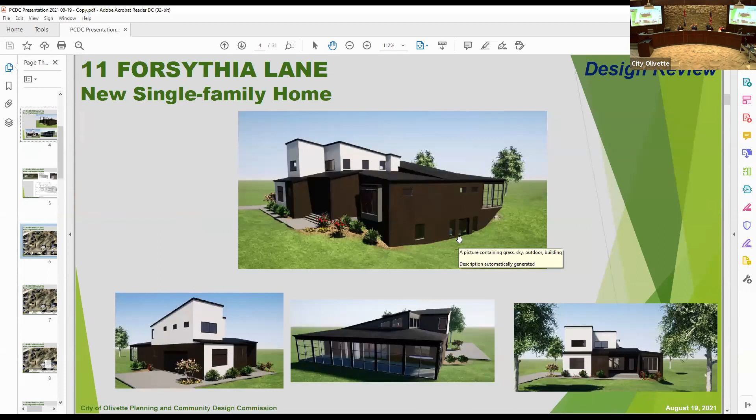There's one hand raised, all right, and we'll get to those. Bryan, since you're not here, did you have any questions for Carlos? I don't, thank you. Okay, Carlos, I don't think there's any other questions. I think it'd probably be good to bring the petitioner on so he can recap their discussions and go through the proposed changes.

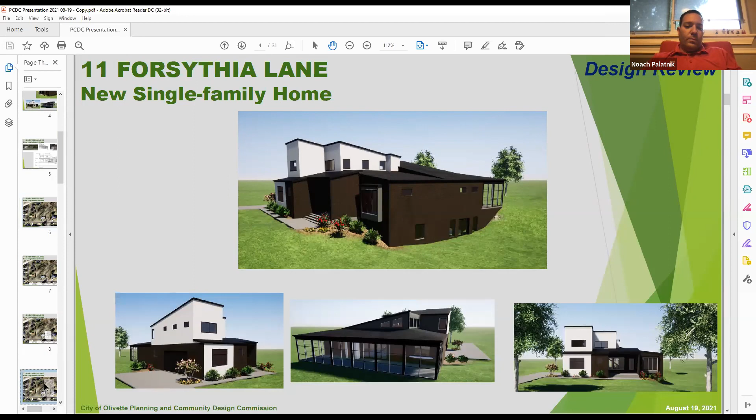Were you able to make contact with both sets of neighbors, or just one? On the east and the west, yes, I spoke with both of them. The neighbor on the west side had no issues. The neighbor on the east side did still raise some concerns, I think.

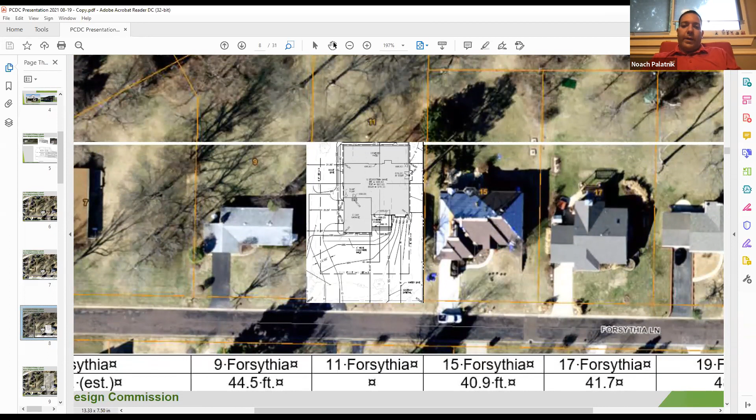Basically what I said is I brought it closer twice, and I understand that from his house, if he's standing in his back door looking towards the west, part of my house will block his western view. But if I would build a ranch house, or anyone else built a bigger house, this is not a very large house compared to some of the newer houses on the street. It could extend even further if it was closer to the street.

I really tried my best. Originally I wanted it in the middle of the lot because I didn't want to take down any trees, and it's a beautiful backyard. But I did understand their concerns. They wanted to make sure the center of the street stays looking like a park. I also, by moving it closer because of the elevation, lost the ability to have a walkout basement with window bedrooms there. So in a way, my original plans for the value and size of the living space got decreased, but I prefer that to having angry neighbors.

How much more did the other neighbors want it moved up? No one gave me a specific number. There is another house on the street that's 48 feet setback, and I did hear from two people that they would be okay if it was at that depth. I explained that I'd prefer not to, because if I moved it closer, the driveway goes around the tree on the west corner of the lot, and I wouldn't be able to do that anymore. That tree would have to come down, which is a very big mature tree. I also pointed out that on the next street over, there are four houses set back about 60 feet from the street, so I'm not the first to place a house at this depth.

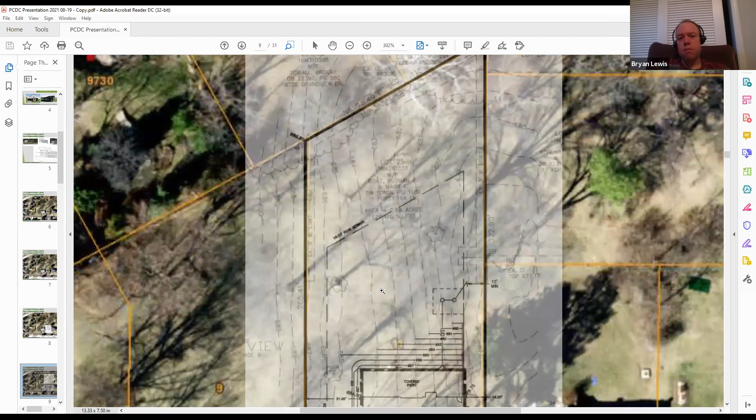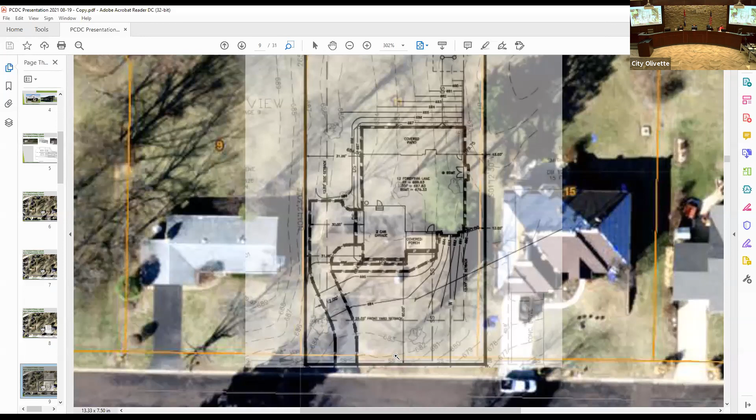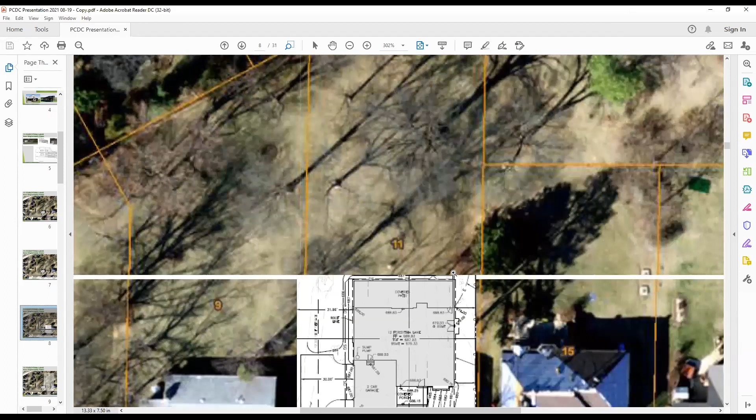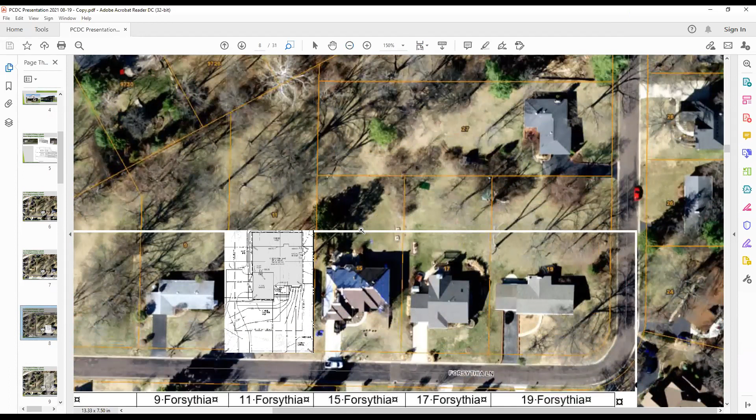Carlos, is the 60 feet the front facing, or is that the depth total for the house? Sorry, Mr. Lewis, I can't hear you. Sorry - the 60 feet is the measurement from the front face of the garage to the street right-of-way, and that's where we generally measure the building setback. You'll see in this graph - bear with me one second. In this slide, we measured one from some plat data that we have on file due to various building permits that have been issued, and then took estimates off the St. Louis County parcel data system of what those distances are, and those distances are reflected in the table on the bottom portion.

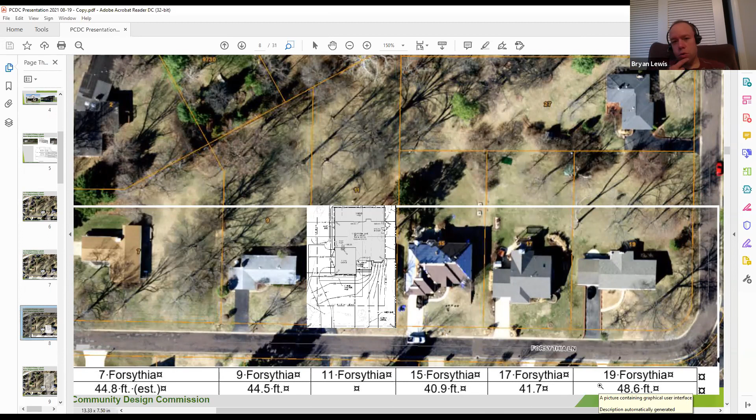Well, I'm not sure - Bryan, did you have any more questions? No, I'm curious to hear from the neighbors because I assume there's a bunch of people on too, but I'm good on questions. Yeah, I think let's see how they all feel about it as well.

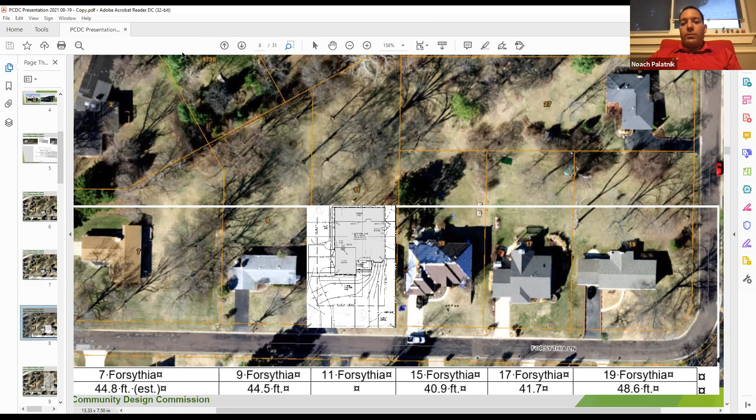A lot of the houses, if you scroll up the street, don't line up at all. Some of them are not even set straight on their side. That's not a cookie cutter street, and I think the neighbors are happy that it's not a cookie cutter street, and people build their own custom homes here. I understand you can't always make everyone happy, but I think twice already I went and moved the house much closer to the street than what I initially wanted, and each time it's completely up to code.

I am not doing anything, of course, that's against city code. So I didn't feel like I needed to meet with anyone on the street to explain that I just want it there. The reason is I don't have to come up with very specific reasons—I just understand it can't make everyone happy.

That's all I have. Would you be willing, after hearing the tremendous amount of people indicating still some concerns, to consider moving it up some amount? I moved it up based on the meetings with them twice, but I got the same answer, that it's not enough, regarding the amount of people.

Sorry, go ahead. Well, the first time it was placed, people from the back of their doors or coming out would see the front of your house. You did move it up the second time, but it was still pretty far back, considerably back. This is getting in line. I'm not sure how every other commission member feels, but it'd be my preference to bring it up a little bit more—that would be my thought.

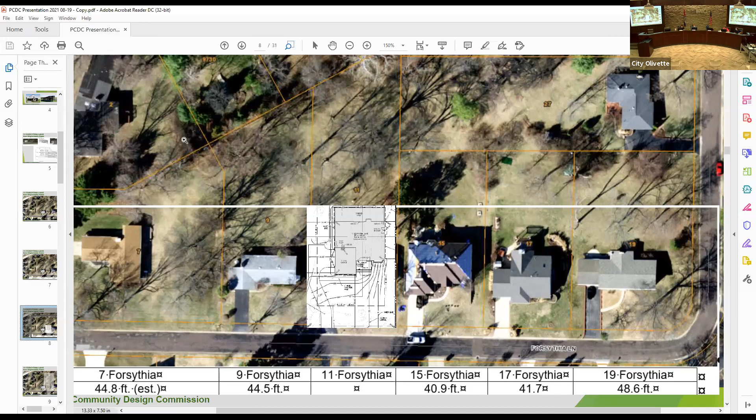I don't think that's the case. I think it's because of the existing ground elevation - when you move it forward, it rises. But Mr. Palatnik, can you confirm that?

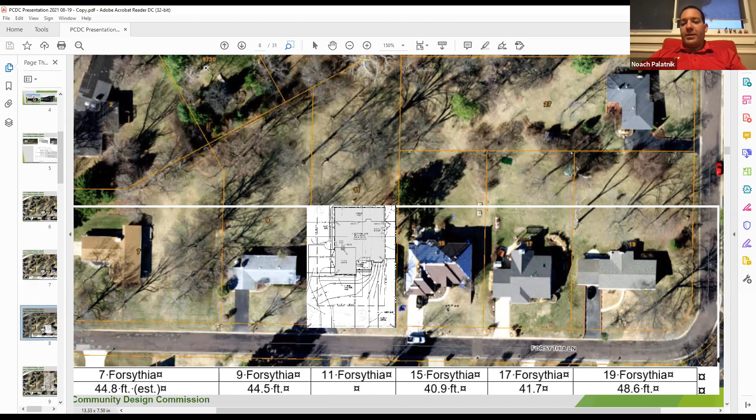Yes, sorry - it's not the last 20 feet that changed it. It's the original plan of the house where it was in the middle of the lot. The lot is flat, completely flat. The only area where the lot dips, just for a very short stretch, is in the middle of the lot, where I was able to get a walkout basement and bedroom windows in the basement - which was another reason I wanted it there originally. By moving it to 80 feet, I already lost that ability, which stayed the same moving it to 60, and would stay the same no matter how much closer I moved it.

Chairman, regarding your question on the motion, if the motion doesn't have a majority, it fails. Okay, so that is the result. That would be the outcome.

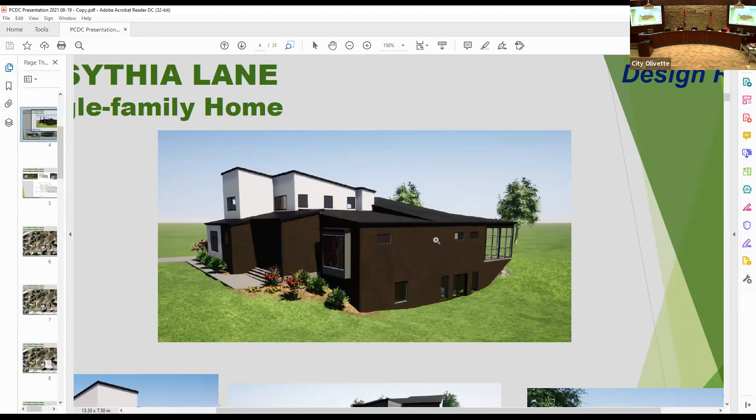Just for clarification, this rendering here represents the original placement. Yes, so this walkout still is represented in the revised plans. So the walkout is not eliminated.

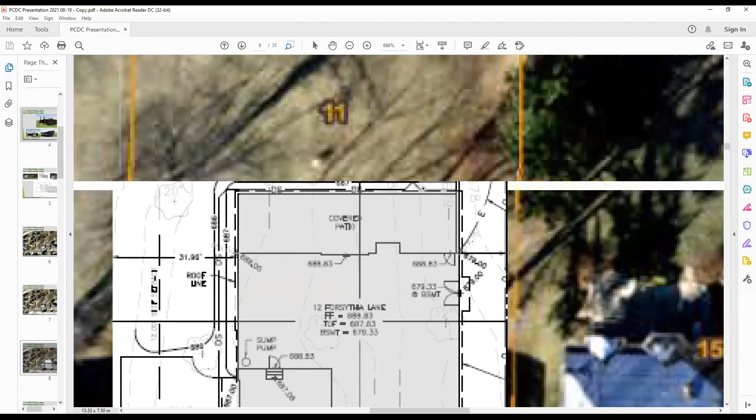It's not. To the best of my knowledge, there was no walkout on the rear part. Yeah, Carlos, this is Jeff speaking. We don't want to go through all the motions of revising all of this and keep having it denied. There's thousands and thousands of dollars leaving Noach's bank account for that.

So all we've submitted to you, and I believe you already knew this, is civil engineering drawings showing how it could be regraded. Correct, and those show the walkout. But that's not gonna happen. In my discussion this afternoon with the civil, because I needed to clarify those numbers, there's still a walkout.

Oh, he's saying it can work? Again, in my discussion with the civil this afternoon, he's showing those contours right in the front. I know the answer to this.

So if you look at the original drawing, you see a walkout and about 4 windows there. By moving it forward, we're digging into the ground with steps going up in order to have only the door to get out of the basement. So I'm still making a door to get out of the basement where it's at right now, because it's not in the middle of the lot where I was able to actually be on ground level.

So I lost all the windows, but I still wanted an option to get out of the basement. I'm not sure what it's called, but they dig in and there are steps to go up. It's a forced walkout, if that's what's going to happen at all. It's a forced walkout, and no bedrooms, because that doesn't change from the 80 or 60 or 40. That only changes from the 150 in the middle of the lot to anywhere closer.

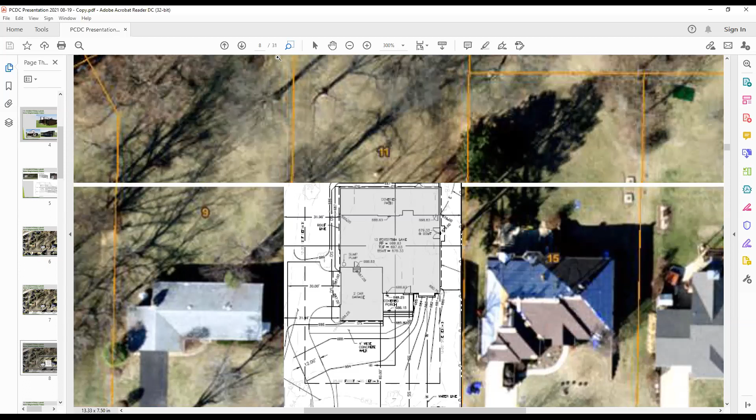And I don't think that is really what Olivette wants. I understand certainly the frustration about the communication and trying to get everybody on the same page. I personally feel like my client has made great strides from where he, and candidly I, originally wanted the home, with efforts to save as many trees as possible. The delta from the front of the home there to the left, if you will, in this image, to the front of the garage is not that great. And we're already losing the one tree.

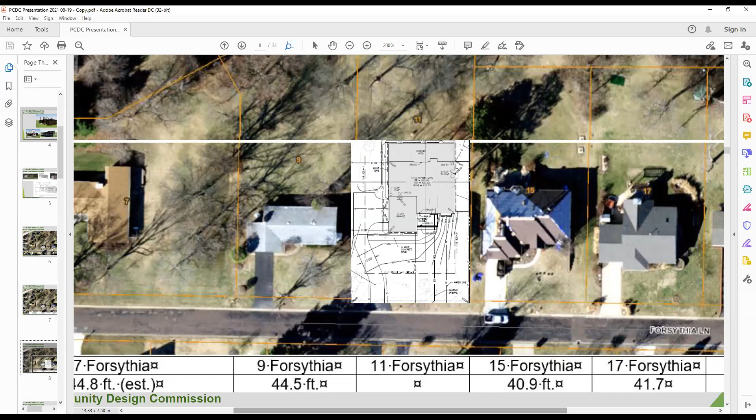This placement allows us to keep the mature tree that's left so that this doesn't feel like a tract home development. I think we all know it takes a great deal of time for a tree to grow to a substantial size. This is an opportunity to, for lack of a better phrase, save a tree, but also save a streetscape that has mature trees and let this house feel as though it either hasn't impacted the community streetscape, or at minimum, it may feel as though it's been there longer because we've left the mature trees. My team strives to do that really on any property we can. And that's really all I have to say.

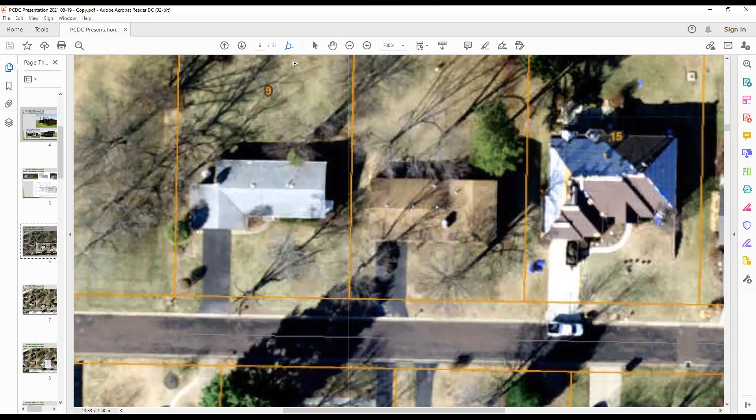Thank you, sir. Any other questions or comments from the board members? Any other questions or comments from the public?

And then I'm just going to ask Bryan if you had any other questions or comments, just since I can't see you. Nope, I'm good. Okay.

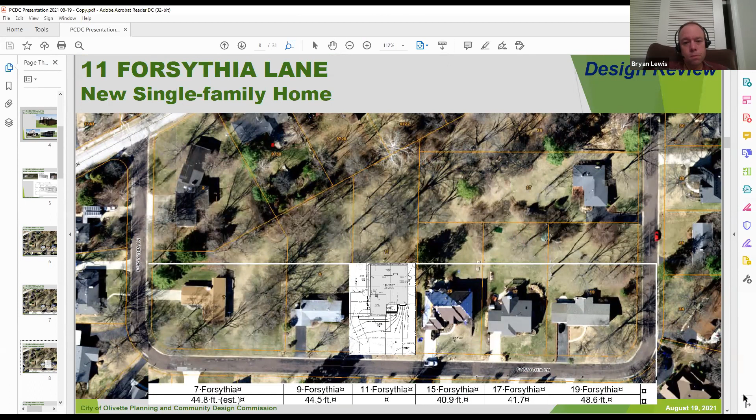Okay, do I hear a motion? Chairman, can I provide some comments on that before the motion is made? Yeah, that'd be great.

When we receive an application for community design review, that reflects that the petition submitted is in full compliance with the city's zoning regulations. The city is solely responsible for the enforcement of zoning regulations, and we have a guidelines book, but those are just guidelines. We use that to assist and establish the community aesthetic standards. They're minimal. Some subdivisions go into great detail, but they're responsible for the enforcement of that detail. All of that's given that we have to apply this to the community as a whole.

We can't be selective to one subdivision and apply one set of standards and then apply a different set of standards to another subdivision. But there's also enough in that document to give the commission some guidance to take a look at some broader pictures like this setback. And the initial setback of 120 feet was significant.

When you reduce that 120 or 125 feet to 80 feet, and then you go down to 60 feet, numerically, it looks like there's been great strides. But again, it started off at one extreme. Bear with me one second.

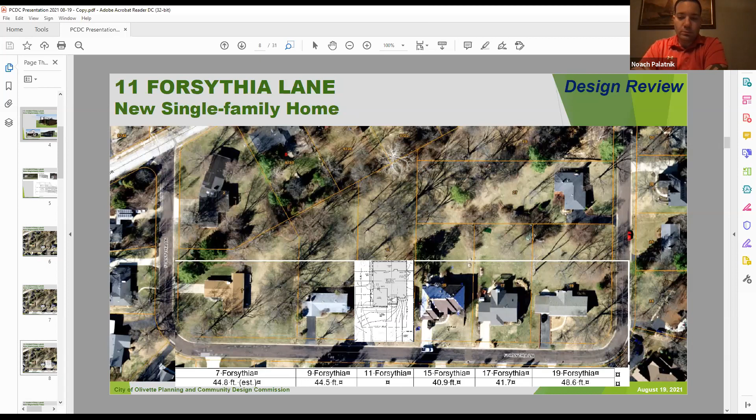Maybe we can just go ahead and make the motion for how it's there with 5 feet closer, if that's agreeable to everybody. So the first motion would be, again, to follow your traditional recommended motion, to have a second, but not to take the roll call vote. Can't we just add in the staff conditions that it would be 5 feet closer? Yes, if the motion maker brings it in automatically, then you are correct. Okay, understood.

Any more questions or comments before we get started? Seeing none, do I hear a motion?

Would somebody like to make a motion? Motion to approve the petition for community design and concept stormwater management plan review for a new single-family home at 11 Forsythia Lane, as presented in the memorandum from the Department of Planning and Community Development dated August 19th, 2021, subject to any staff conditions noted herein, that there will be an increased setback. The front yard setback will be at 55 feet. Correct, I think that's pretty close. Is that right, Carlos? Yes, sir.

Okay, do I hear a second? I'll second. Okay, motion's been made by Tim Spiegelglass and seconded by Jody Rich. Carlos, will you please call the vote? Yes, sir.

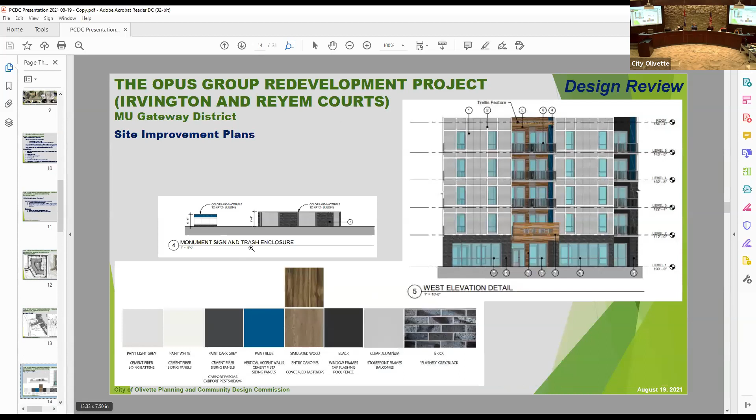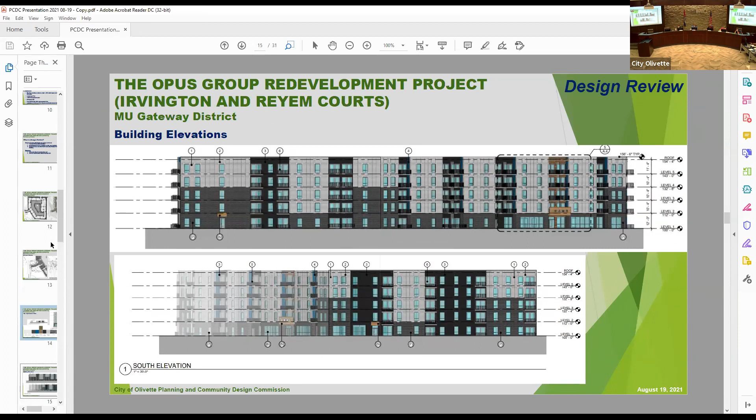But that being said, they went through an extensive process to illustrate their building and designs, and incorporated various comments that the commission had regarding screening of the balconies, the retaining and buffer wall, and the landscaping, and heard various concerns from adjacent neighbors regarding the impact the development would have on their properties. But overall, the process did go through, and a master development plan was adopted.

It was forwarded to the city council, which adopted that plan. And this is the final step, where you see, like any other single lot development, the improvement plans or what's proposed. That's what you have before your packet. There hasn't been any significant modifications.

The building footprint itself did kind of tilt a little, but nothing significant in there. That was as they got more down to engineering and things of that nature. Overall, the elevations remain the same, the landscaping remains the same. You can see they've updated the plans to reflect

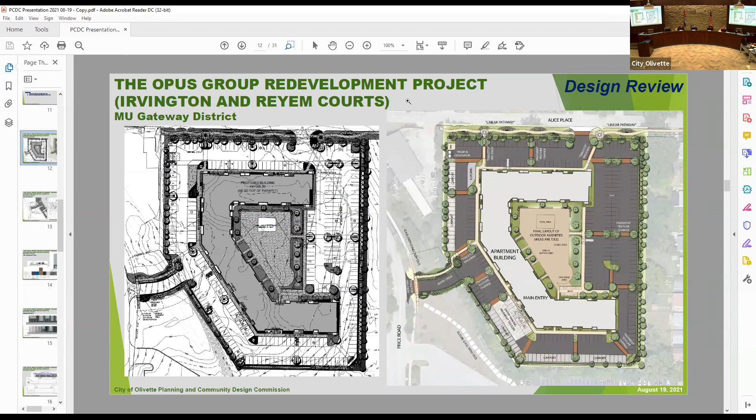the park area along the front in there, and I'll show you that more detailed illustration here. Of course, that will get extended to Hilltop down here to the east and to Price Road down here to the west, with the city doing the improvements on the western side, given a contribution from the developer, and then the developer doing the installation of the sidewalk on the eastern side to Hilltop.

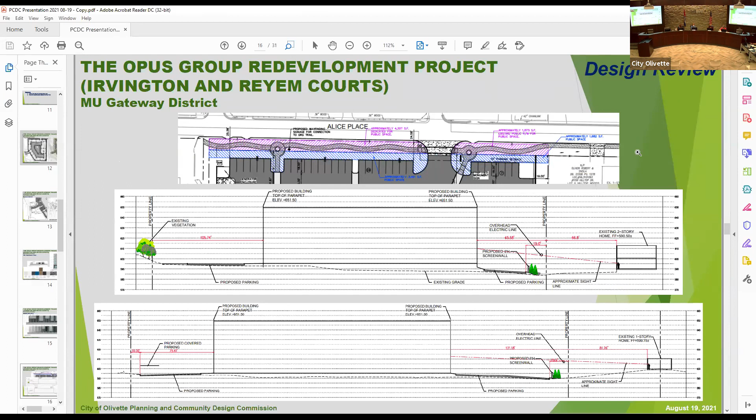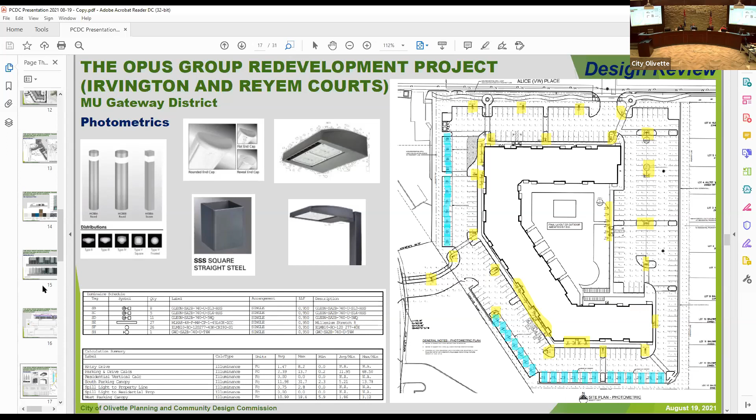So be glad to answer any questions. The petitioners are in attendance, they have their full team here, including their architect. But really, this is the design review. And given the size and that it is a single building, there is no significant change beyond what the commission has seen back in April, or what was presented to the city council.

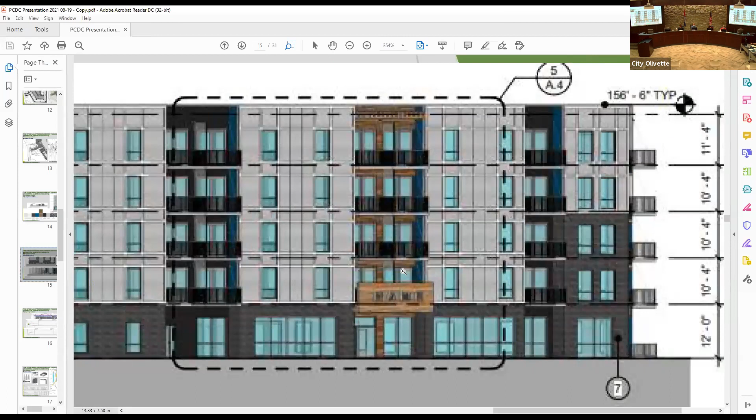They've incorporated the screens again for those balconies, addressed the buffer wall and some of the landscaping, and also the front door and the elements to help identify it a little bit more. There were some comments from the commission, and I think all those were illustrated in other applications.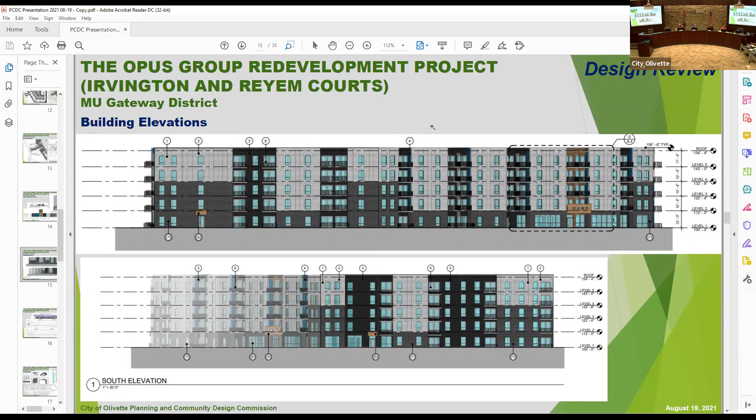The other thing, we know that there was concerns from adjacent property owners regarding how that would impact or have a weight on their property for future use as single family residences. The city has been in discussions, is aware that there's been discussions of another group trying to assemble some properties along that area. Now that is going on privately. I mean, we are aware of those. I'm not sure there's been any finalization of acquisitions or contracts yet, but that does seem to be proceeding, and we'll see how that goes and update the commission if any new plans or developments arise.

Be glad to answer any specific questions. And again, this pretty much reflects what the commission saw back in April. The details include all the amenities and the illustrations that were in there.

And again, just to be honest, there was, the building just kind of tilted slightly. Where did it tilt? More along, I would say, like the footprint itself kind of tilted clockwise. Like rotated, the whole building? Yeah, but rotated, within a foot's tolerance. Yeah, so, okay.

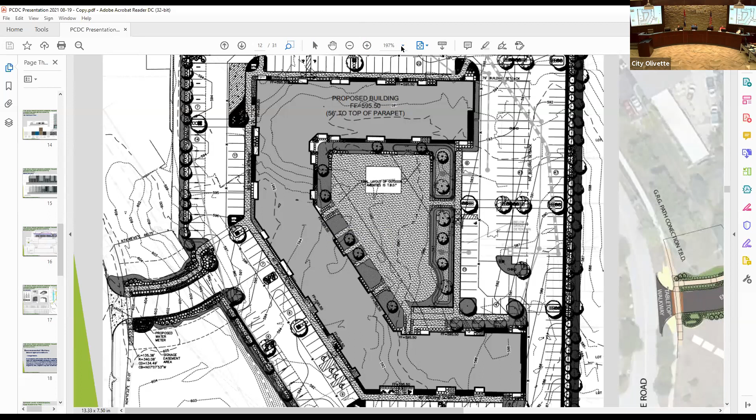My only question is about the Great Rivers Greenway. I know it says to be determined, but I was just curious to see if there's been any further discussion on that or any developments with that.

That's a good question. So there has been discussions among the developer, the city, and the Great Rivers Greenway. This section of the Great Rivers Greenway path has not been finalized, there's not a final design yet, just a preliminary design. The Opus Group is willing to work with the GRG on that, and so far everything's kind of coordinated together. At this point, GRG is just really not sure where the crossing will be, or the property acquisitions and where the trail placements would be more specifically here.

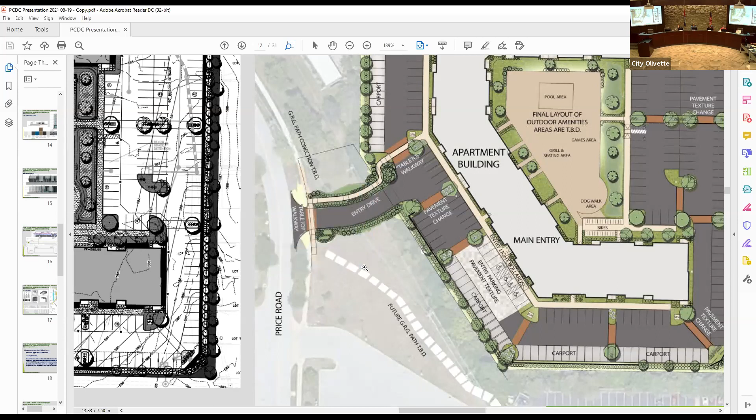Will that be determined before they potentially would start construction on this? No, but I think some of the agreement is that if not, the crossing would be pretty much along the current sidewalk path. In there, some of the discussion's been more about how that, and I think here the developer is trying to illustrate that there would be some type of, I forgot what they call it, Tabletop, where it goes up to a flat spot. And I think that's a good way to address that.

Carlos, I just wanted to check one question. The location of the entry drive, is that pretty much set at this point? I know for a while there was a lot of discussion about where. Yes, they were looking at that. One is that they've secured through the CVS property that they would have access through that.

And that was primarily through actions of the commission and the council back in 2004, 2005. There was flexibility in the placement. This is the preferred placement in there. And the only issue at this point would be that there is some title issues regarding the ownership of Price Road, that the city is taking charge and working through those, with the full intent that it is our road, we maintain it and we surface it.

But we need to confirm the title. We need to clean the title on it, really, is what that is. That may happen in various means. One, it could be voluntarily released by all the property owners since they don't maintain it - it's been the city's maintenance for years. Or we go through a court to assign the title or the right of way to the city. I don't believe there would be any opposition, but I can't guarantee that.

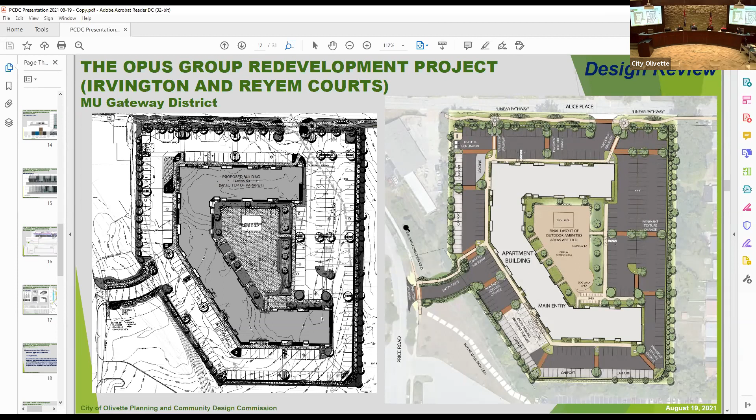I do have a motion for the commission's consideration. There are no other public comments or anybody else identified as wanting to speak. If you can bring up the recommended motion, that'd be great. Do I hear a motion?

Go ahead, Carol. I'd like to move that we approve the petition for design review in accordance with section 400.2180 for construction of a 5-story, 207-unit multifamily apartment complex, in accordance with ordinance number 2726, as presented in the memorandum from the Department of Planning and Community Development dated August 19, 2021, subject to any staff conditions noted therein.

Motion's been made. Do I hear a second? Second. Motion made by Carol Wagner and seconded by Tim Spiegelglass. Carlos, will you please call the vote? Commissioner Spiegelglass, approved. Commissioner Lewis, approved. Commissioner Rich, approved. Commissioner Wagner, approved. Chairman Dragell, approved. The motion passes unanimously, 5-0.

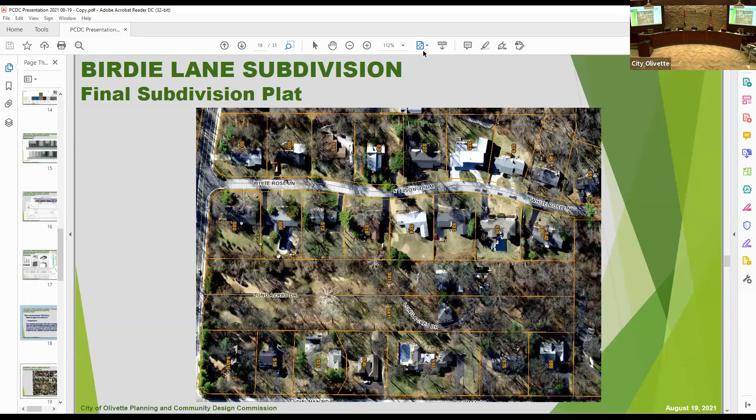The next step is what we term a final subdivision plat. The final subdivision plat specifically is the legal instrument that gets recorded for the creation of the lots through St. Louis County. It's a state mandated process. At this point, the commission is just reviewing the plat itself, and this is the plat.

The plat does not contain any information regarding topography. The plat doesn't contain any information regarding house footprints or trees preserved or the width of the street, the sidewalk or such. All it does is illustrate each of the legal aspects of the subdivision grounds, which includes each individual lot, all easements, all right-of-ways, and any other significant notes that are to be maintained on the property.

In this case, this plat goes above and beyond to conform to the conditions of recent amendment by the commission to establish easements for all the detention swales that will be serving the common ground detention basin. It also illustrates the calculations for the size of the lots that were used in there. That'll be more in your paper version.

And then we also get a copy of the indentures, and the indentures also note, and this was shared with the commission at the last meeting, how the common ground and those easements would be maintained and such.

So this allows the process for each individual lot to come before the commission without its own on-site detention system for the first construction of the home, subject to the conditions that were approved by the council, recommended by the commission and approved by the council.

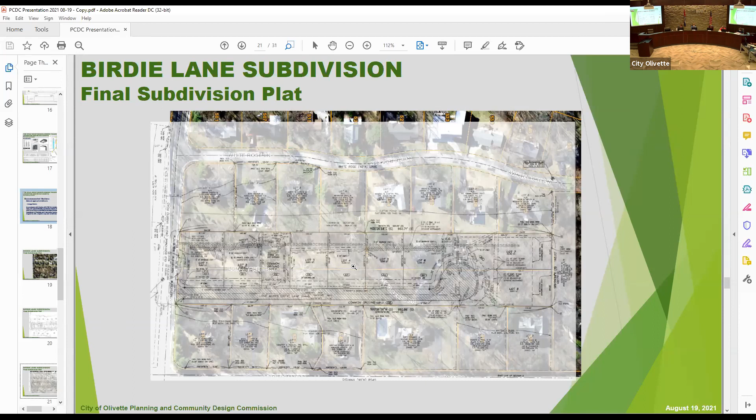So be glad to answer any specific questions. Again, this is just the legal instrument that will be recorded at St. Louis County. On our website, you can find the preliminary plat, and you can also find the improvement plans that give more specifics to the location of the infrastructure, the roads, the sidewalks, potential building pads, tree locations, and things of that nature. This is just the formal document that establishes the lots themselves.

Chairman, be glad to answer any questions. Yeah, I don't have any questions. Does anybody else on the commission have any questions, comments?

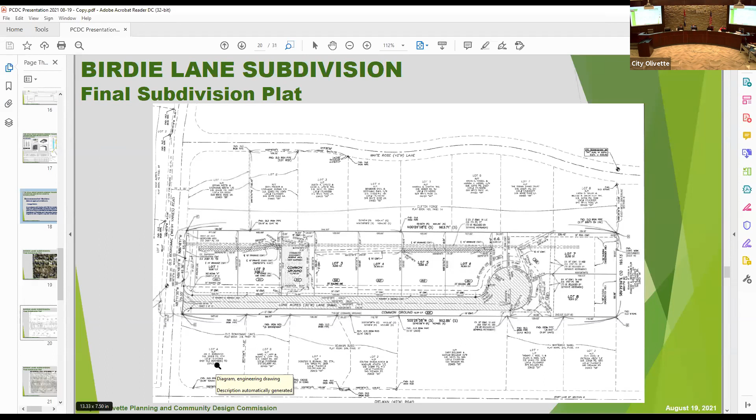Brian? Nope, sir. Now, I will note the actions of the commission are in the form of a recommendation because this also has to go to council. Ultimately, the action here authorizes the city to sign off on this document to be recorded with St. Louis County. Great, great. Thanks for that clarification.

Yes, sir. Do I hear a motion? Or do we have any public comments? I do have a representative, Mr. Jokers, in attendance. If Mr. Jokers, do you have any comments, let me know. And then if there's anybody else that would like to speak in regards to this petition, if you click the raise hand button, I believe it's on the lower part of your screen or monitor.

And Chairman, there are none. Okay, do I hear a motion?

I'd like to recommend to approve the petition for final subdivision plat in accordance with chapter 405 subdivision regulations for the single family lot subdivision to be known as Birdie Lane, as presented in the memorandum from the Department of Planning and Community Development dated August 19, 2021, subject to any staff conditions noted therein, with the condition that the final plat is reviewed by the city attorney.

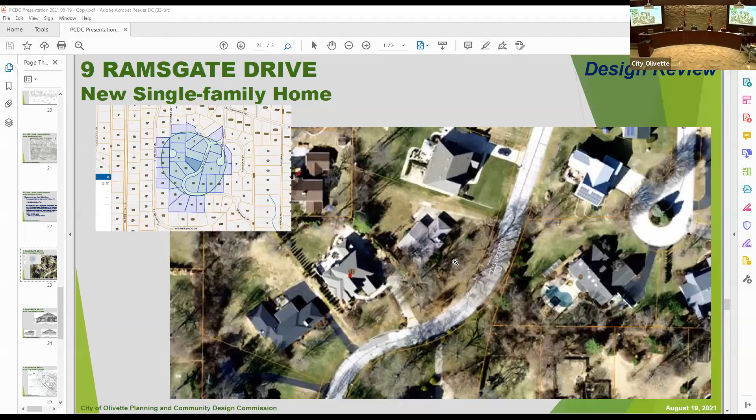Okay, anybody else on the commission have any questions or comments? Brian, Brian is recused from this side. Oh, that's right, thank you.

So maybe we can hear from the petitioner if we need to. Bear with me one second. All right, Mr. Bulejski, I'm going to promote you to panelist. Again, if you can state your full name and address, and if you have video capability, it'd be great to have that on.

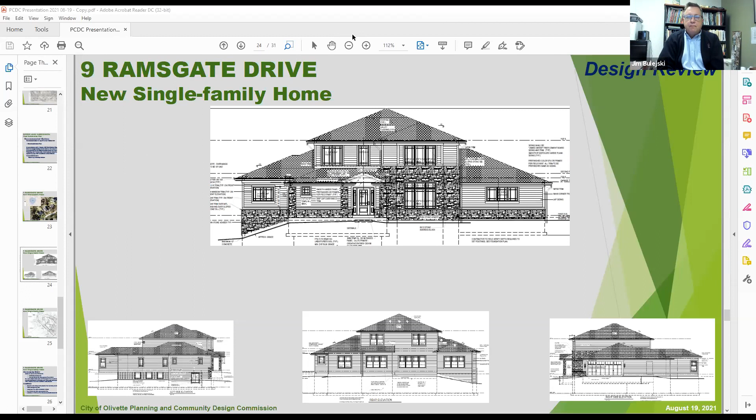I am present and I can answer any questions anybody has. But I think we're doing fine here so far. Let's just carry on. Good, good, good. I appreciate it. Any specific questions for Mr. Jim?

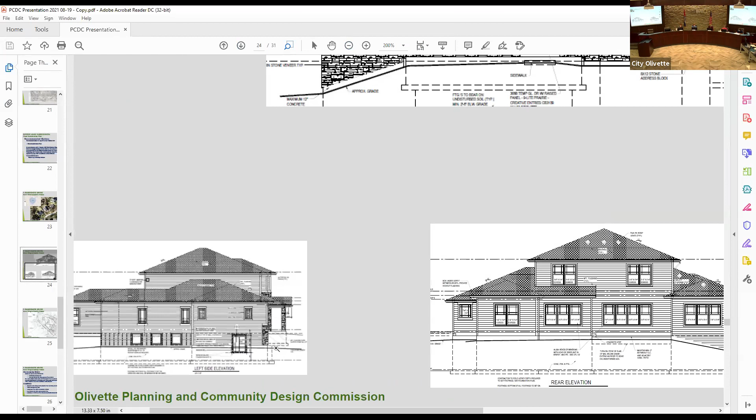No? Chairman, if you can go over a little bit about how that grade works, just to make sure. Jim, kind of describe the discussion about the grading with the front yard. Right, it appears we're gonna have to get a swale coming out. I noticed on the existing photo right there, there was a rock swale running through there. We'll have to direct the water perhaps in a similar manner between the proposed house and the house on the left.

Then maybe you could add some discussion. I think Carlos mentioned something about the sump pump drain. Where is that likely going to be discharging, and will it go into that same sort of area? It can be taken into the detention area as opposed to being daylighted. The concern on that, well, we would welcome that, is that the detention is sized based on that house square footage, which is well and above the MSD standards, which uses an increment. So I'm actually taking in more detention on new single family homes than previously existed, even almost in some cases twice the amount or more than the hard surface area that was already on a property. The issue is with a sump pump, we never know the groundwater table, and it can have the ability where it could take up some of that capacity that we're trying to reserve for that storm increment.

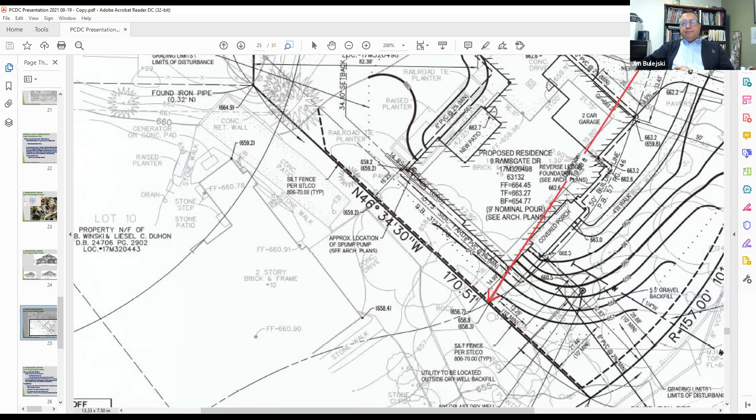The second thing was concerns from some of his subdivision residents on the further end, specifically the amount or volume of water going toward the homes on the southern end of Ramsgate. We went through the process and the on-site detention that are now required by code, and that appears to have alleviated or addressed the concerns he was expecting for this petition.

I appreciate that the developer contacted the neighborhood trustees, spoke to them, and had that review with them. I think that's good. Okay, that being said, Carlos, were there any other public comments? I see none, sir.

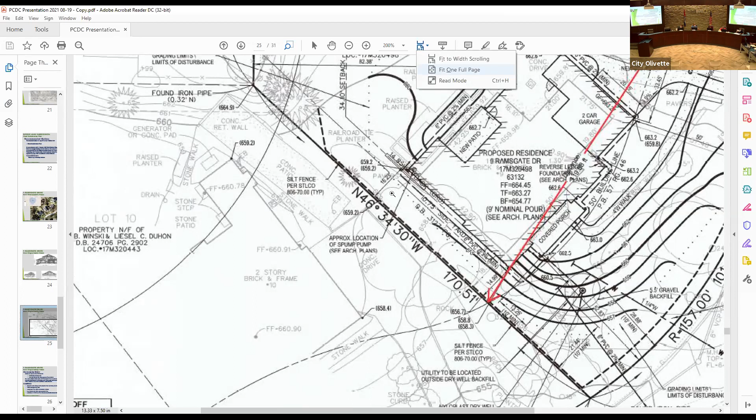Being that, do I hear a motion? And the motion will be on your monitor. Go ahead, Carol. Mr. Chairman, I'd like to make a motion.

Motion to approve the petition for community design and concept stormwater management plan review for a new single-family home at 9 Ramsgate, as presented in the memorandum from the Department of Planning and Community Development dated August 19, 2021, subject to any staff conditions noted therein. The conditions noted are to address the swale along the south property line and sump discharge, traffic management plan, landscape plan with assessment of trees, final stormwater site improvement plan, and limitation of top of foundation, final plan submission, verification, and limit to foundation exposure.

Motion's been made, do I hear a second? Second. Motion's been made by Carol Wagner, seconded by Tim Spiegelglass. Carlos, will you please call the vote? Commissioner Rich, approved. Commissioner Spiegelglass, approved. Commissioner Wagner, approved. Chairman Dragell, approved. The motion passes unanimously 4-0.

All right, good job. Thank you. Thank you. Thank you, Jim. Remember to bring Brian back, Carlos. Yes, he should be. I'm back. There he is. Okay, good, good.

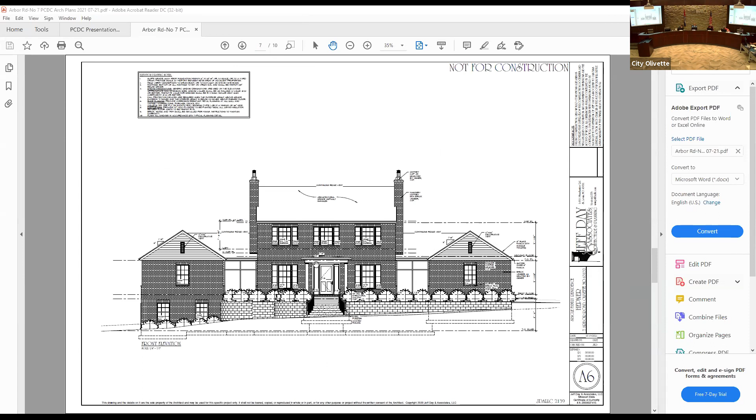This is the front elevation. It has plenty of breaking in the mass, different roof lines, and it is a side entry garage.

So overall, from a staff perspective, the building itself meets the spirit and intent of the design guidelines, and it is fully compliant with the SR district zoning regulations. The next aspect, which we'll probably talk about the most, is the site grading on the property. Bear with me one second here.

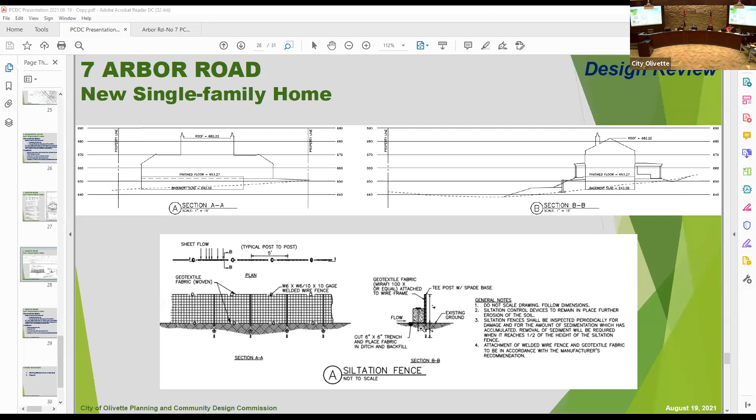This is an area where, because of the ravine that runs through the front of the property, we've been made aware and are cognizant of the watershed in that area and the volume of water that goes down through there. It's a large watershed. Once that watershed hits the limits of Olivette, it actually becomes floodplain area as part of Ladue. This ravine, which is primarily a watershed collector running south, goes under various driveways.

In some of those driveways, the ravine itself is in the crossing of the driveway. There are areas where the culvert or the pipe of the crossing is just too small for the volume of water, so we've had instances where it backs up as you get uphill in various properties within this subdivision.

To some extent, there's good and bad with that. It helps minimize the volume going south, especially into the floodplain area. We're responsible not just for Olivette area residents, but the floodplain and the area as a whole. The people in the properties east of Arbor Road, off of Covington, have severe flooding in there, and this kind of holds back some of the water.

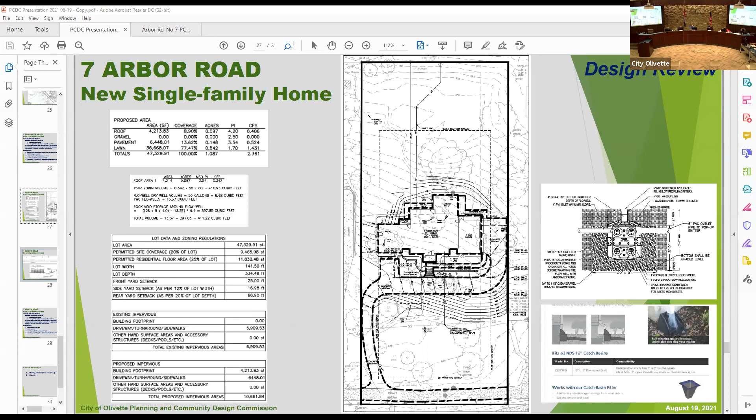Carol and Brian, and Jody, did you guys have any quick thoughts? Nothing jumping out at me. My quick thought is that it's almost too symmetrical, with the two chimneys coming up and the full brick facade. I'm still thinking about that, not sure yet.

I think the change in elevation helps with that, but I understand your thought.

Okay, Carlos, maybe we can bring on the petitioner. Mr. Day, I'm going to promote you to panelist. I don't see anybody else on your team there; if there is, just let me know. Again, if you can state your name and address, and if you have video capability, have that on.

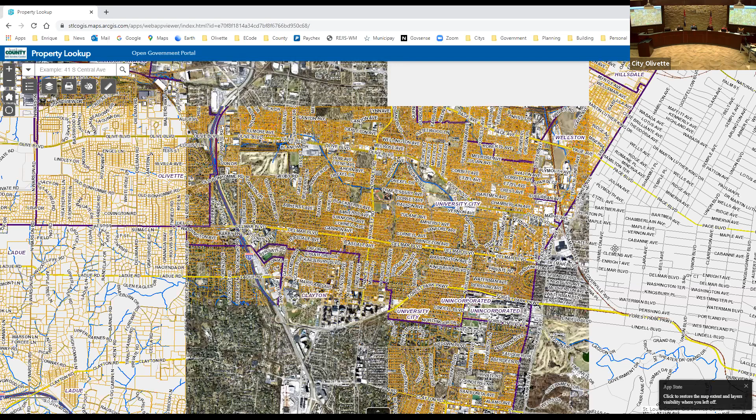Don's predecessor, John Roper, talked to us about stormwater and all of that. Probably one of our next steps will be to break down large areas like the area around Arbor Road and deal with some stormwater for that whole section. Because dealing with one property isn't going to impact the ability of the area to deal with stormwater.

And we started to take a look at larger sections of the city when Jonathan left. But that's really, again, what we're talking about here, taking that step.

I agree. But if I understand it, if they're gonna put a detention on that property and bring the whole entire roof into that detention area, this is a plus to that neighborhood, compared to what was happening before.

You're taking up whatever size house that is and dumping it into a detention area, where before that was going into that culvert. But the bigger issue, I think, is the complete runoff. And when they change the size of that culvert that's there to make it larger, downstream of that is going to get a much greater flow of water that could impact those other neighbors.

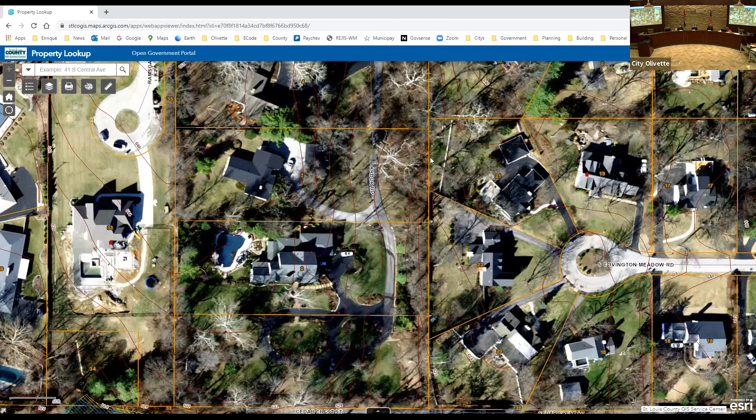Along these areas here off of Covington, they've had a lot of erosion along this back area. As I pull back, you'll see where that blue line starts to cross and gets right along that portion. That erosion is primarily caused by the volume that's going down.

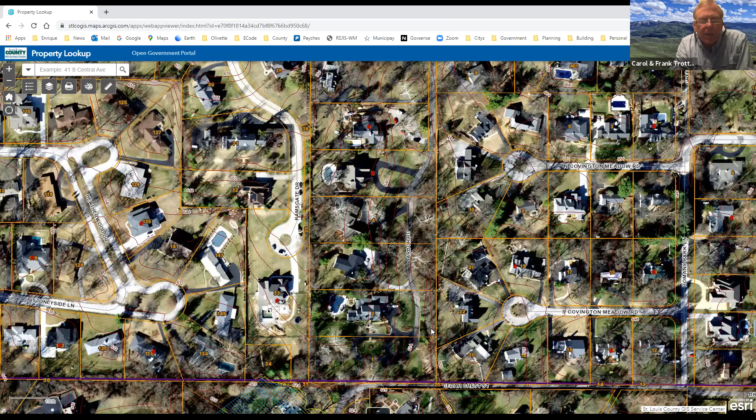All of Covington is uphill, so the water doesn't escape and go into Covington. And the drainage served is, as Carlos mentioned, Old Bonhomme, a little portion of the far north end of Ramsgate.

The Bowood subdivision actually has pipes connecting to dump the water at the junction of number 7 and number 6 on the east side of the road into a small system that we have. So all that water collects, and it has increased per the report that Mike put together over the last 20 years. We've been at number 1 and number 2 Arbor Road.

I am a trustee of the Lower Arbor Road subdivision, and we've been in the neighborhood for 40 years and have seen more and more water piling up at number 8, number 7, and number 6 over that period of time. I think our primary suggestion is just that we work together, possibly widen or deepen the ditches that go through there.

Have a larger pipe at the south end of 7 that can connect, if possible, to the pipe that goes under number 6. Otherwise, Joanne Schutte is going to be very upset with an extra lake in her yard, as the commission has noted. But once it gets in the creek, it will flow.

And I think the creek capacity, I don't have a formal engineering background, should handle most rains, not every rain. And then exit out into the Oakley subdivision in Ladue.

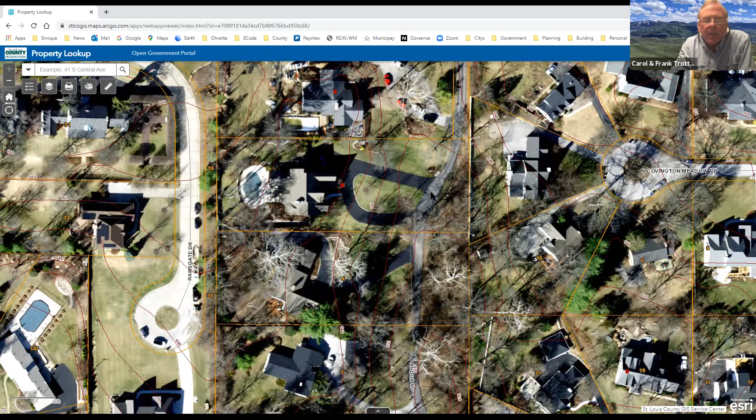You see, we're just, Carlos, if you could move a little bit in between the U of the number, right of it, right up against the road. There's a drain there that connects into the pipe, and that goes directly under the road into the creek, a little bit south of where Carlos is, right there. That's the crossing point. I believe it's 12 or 18 inches.

There's historically been a fox living in there, but I think it's departed. 12 or 18 is a pretty big difference. I understand, I've never seen that pipe fill, and I've trudged up and down in the rain quite a few times over the years.

If you look on the very east side of number 5, we constructed a rock on the east side, Carlos, right up against the property line on the east. To the east of the road there, we constructed a runoff area that handles water that comes in at a drain at the junction of number 7 and number 6 on the east side of the road.

MSD actually helped out with that a little bit. There's a small drain that carries some of the water there, and that in extreme rains gets a bit filled up because it also handles water from Bowood and from Covington.

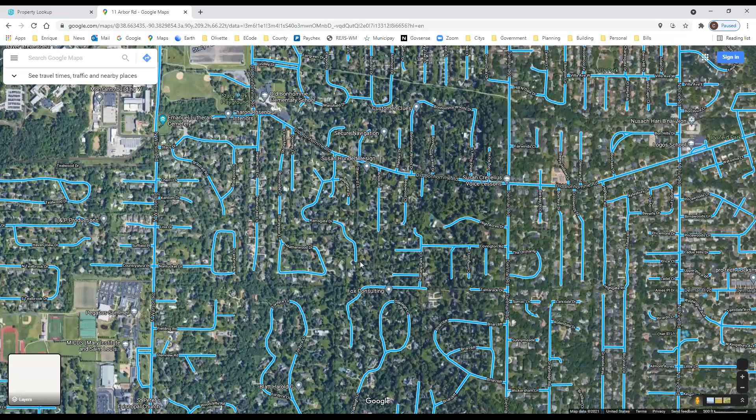So my question would be, are all these bits and pieces we're talking about part of a comprehensive plan that takes into consideration the larger picture, not just one man's opinion, but an actual civil engineering company that does a broader scope study of what's going on? I ask that because we had a project in Glendale, not Berkeley, where in essence they went somewhere in the range of about a half a mile radius of this property and did a water runoff study to see what the impacts to that particular lot would be.

It seems to me, and I get that it's completely fine to have this conversation tonight about bits and pieces, but it seems there's a bigger picture that really needs to be resolved, and that should be kind of a community effort beyond the Mike Gartenberg report and into more of a civil engineer's study of what's really going on and how to correct it — like a hydrology report. Yeah, absolutely a hydrology report, because it seems like we're talking about a bunch of Band-Aids or Scotch tape on issues, and as painful as I'm sure it would be financially, I think a broader study is going to get everybody going in the right direction. Do you guys think you could get your community to rally around that financially and approach it more professionally?

Couple things — thanks for the idea. Mike, as far as I know, honestly, maybe Carlos or somebody knows if he's an engineer of some sort, tried to be as comprehensive as he could. He looked at MSD maps, looked at the water runoff, talked to people at the city and beyond, and certainly we'd support that. The 8 homes on the subdivision have tapped ourselves out pretty well with Mike, frankly, on the financial side, and would welcome, say, MSD coming in and taking a look at it. But I think, unless for some reason Olivette chose to be involved, which we certainly could support as well.

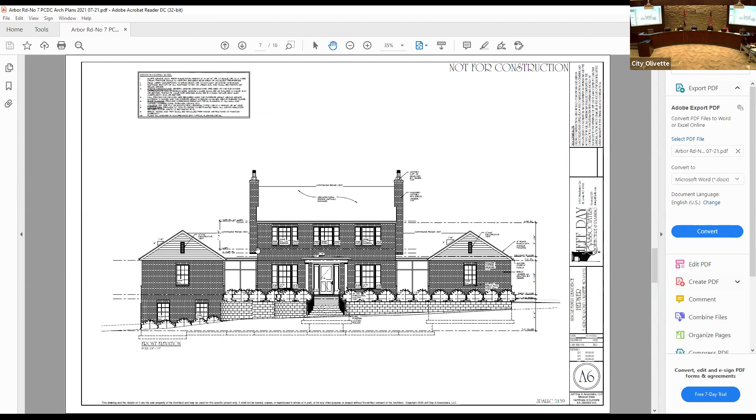Karen: So the front elevation would be in front of your monitor right here, where a majority, probably 75%, is all brick. On the rear elevation, there's brick along there, probably drops below 50%, but well over 25%. Then here are your sides. This is the side if you were driving south towards Ladue, where the lower level has brick, and then there is Hardie board here and along this elevation here, and then this is the roof area.

And then the south elevation, so this is if you were driving northward to Old Bonhomme—this is the garage area that would be seen, and there's only brick along about a little higher than a knee wall height along the garage elevations, but the elevation is broken with this roof line here.

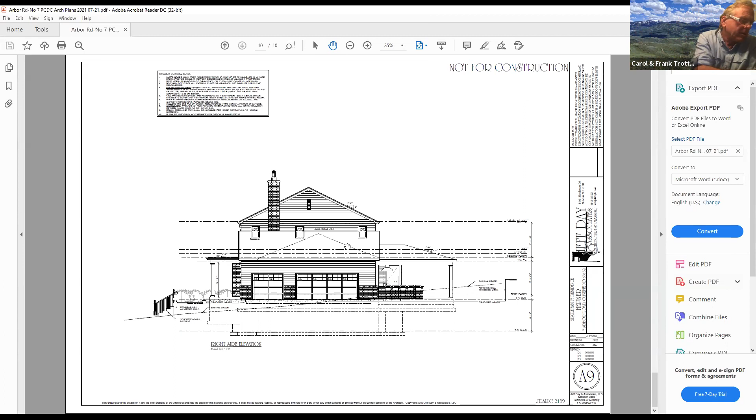So my question still stands—I'm not sure what Mr. Trotter's saying he doesn't like about the brick that's proposed. Are you saying there's not quite enough? Yeah, he wants brick on all four sides. I just want to be clear. On three sides, we would prefer that on the north and south face to eliminate the siding and have brick consistent with the front view. So your preference would be that it would be almost 100% brick on all sides? Not all sides—on north, south, and east.

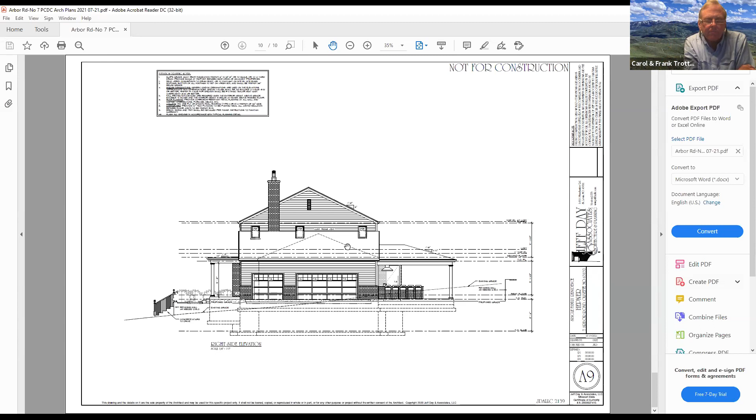And again, it's the commission's job to decide, but that was our request. Thank you.

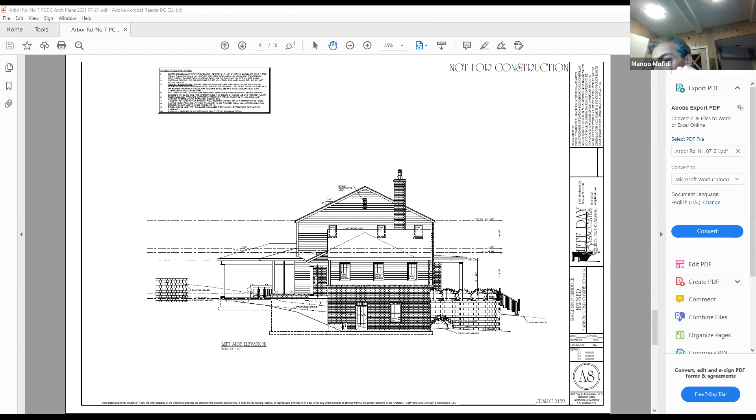Yes, sir. Okay, we are number 8 Arbor Road, so the property immediately to the north of the proposed project, number 7 Arbor. Just to give the commission a little background, we moved to the property in 2015, so we've been here a little over 5 years. And I can tell you that the stormwater issue has gotten worse every year since we've been here.

I believe we have provided Mr. Trejo's video and photograph evidence of the lake-ing that takes place—it's not just ponding, it's laking. I think Mr. Trejo earlier showed a Google map showing the front part of our property. Whereas in the first couple of years that we moved in, the culvert would overflow. Now our driveway overflows, and it of course occurs in front of number 7, and then also in front of Joanna's, who is in number 6.

So our home is right above that driveway, that culvert in the middle. So when it rains, our driveway that goes between the culvert is not visible—it's just filled with water, all of it moving towards 7 and then ultimately to 6. So the problem has gotten worse.